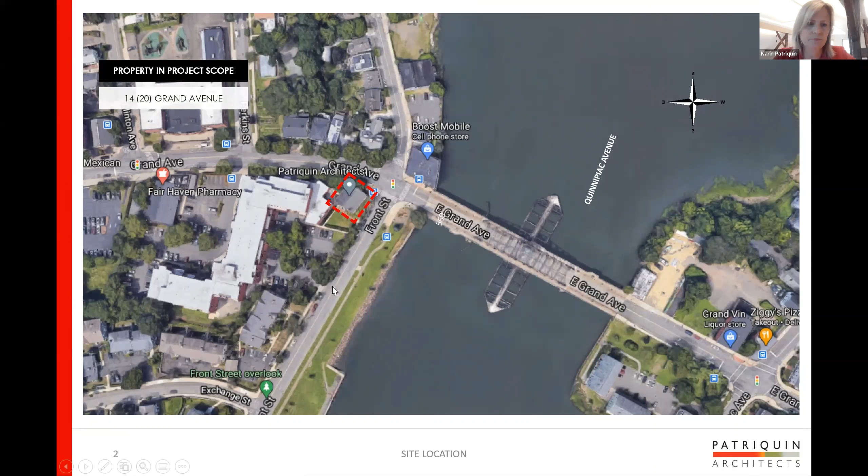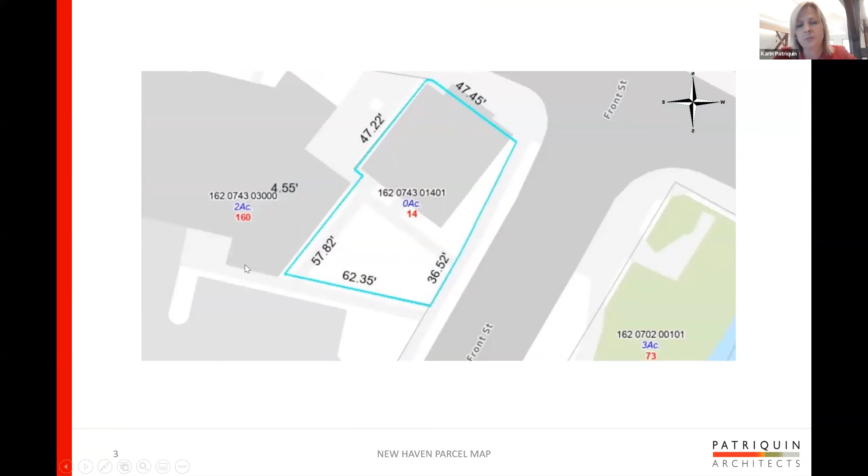This is the extent of the property as it currently stands. So our building and a lawn in the back. And then we have shared parking with the neighbor next door. So here's some Sanborn maps that really speak to what this was in the 19th century. The earliest Sanborn that we were able to find is 1886. You see top left, the building here in pink signifies masonry in these Sanborn maps, and yellow is wood. What's now our current masonry building is here in the top right.

And there were these buildings that were added to the side of it and to the back of it by King. So you can see also the addresses, interestingly. Our building was between 14 and 20. So four addresses for our building alone, and then it went all the way up to 42. And to this day, there are some records that call this 14, some call it 20, some call it 14 to 20 Grand Avenue. The next one here, oops, sorry, I didn't mean to do that.

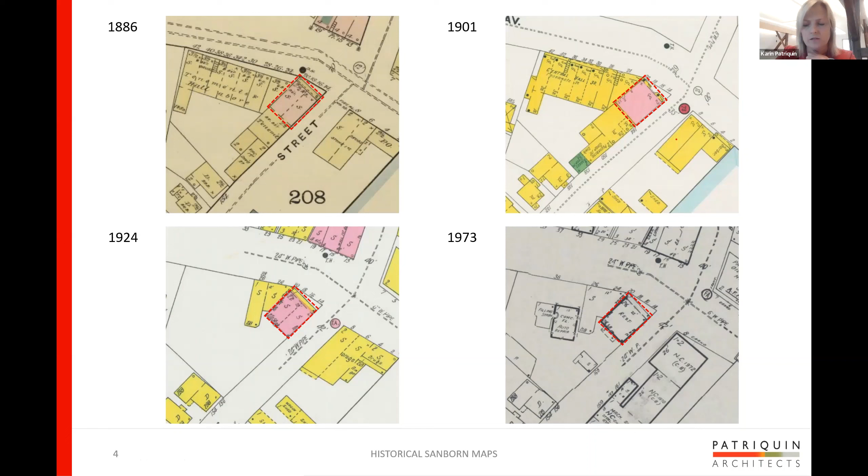The next, top right, you can see there was a slight change here, not too much of a change, but by 1924, the bulk of the buildings that were attached to the masonry were taken down. We don't know why particularly, but certainly by 1973 there was still one building off to the side, nothing off to the bottom except a fire escape stair, and this little building here was on the property somewhere. So Sanborns are always interesting to look at to get an idea of the history. Basically, we really see the history on the building.

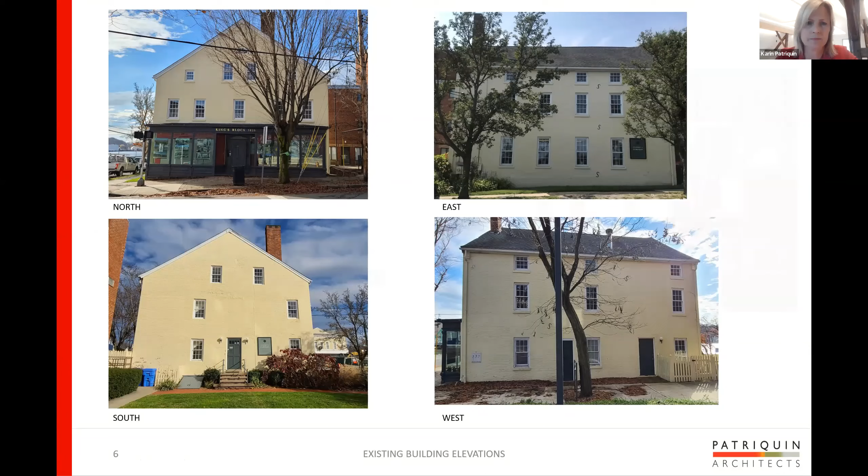So this is from our application to HDC for our renovation. Our renovation is really mostly an interior renovation, and that was very specific. We really wanted to bring this up to a passive house standard, but did not want to touch the windows. We looked at pricing windows that would look exactly as these ones did, extremely expensive and also not nearly as energy efficient as the ones that we finally went with. So we decided to do everything on the interior. We re-insulated on the interior, recreated an air barrier on the interior, and added windows to the interior.

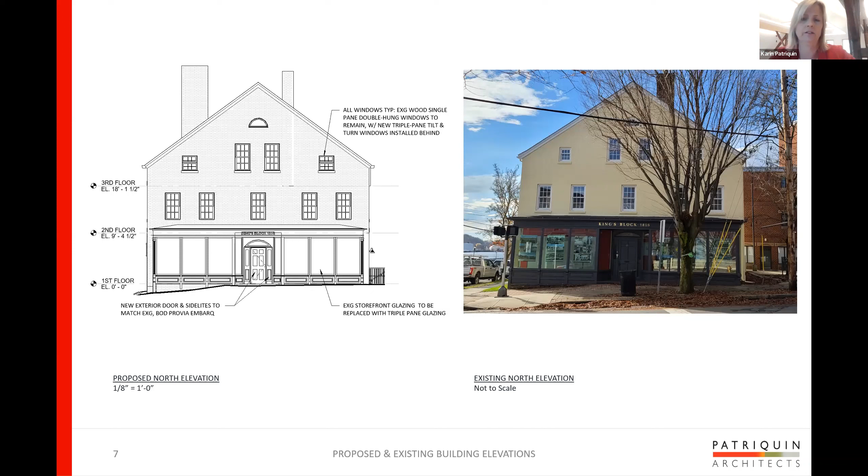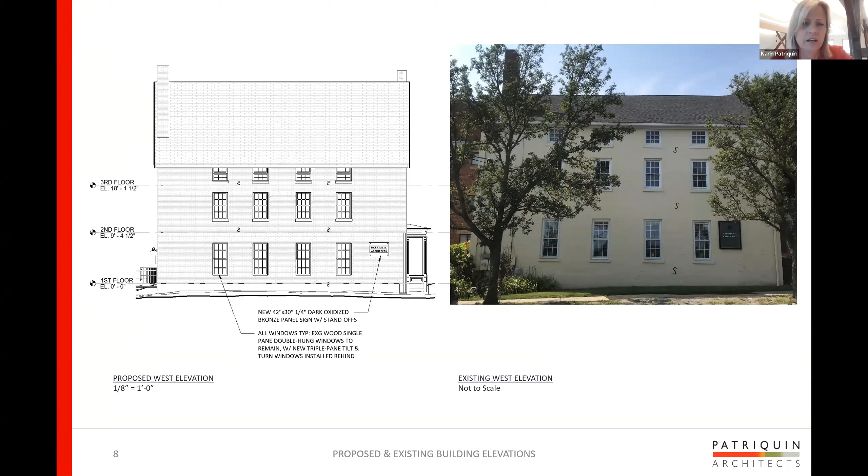Here's our front street facade, and here all we're doing is changing some signage, and again we make a note here that we're adding windows to the interior. And here on the back again is our argument for where to put any of the penetrations that we need for our new mechanical systems.

The idea again here being that this was already something that was not necessarily supposed to be a very visible part of the building when it was first built and over the years, so we allowed ourselves to put small penetrations here, and then we painted them the same color as the yellow here, for those intake and exhaust of our new mechanical systems, and then some signage and some new exterior lighting.

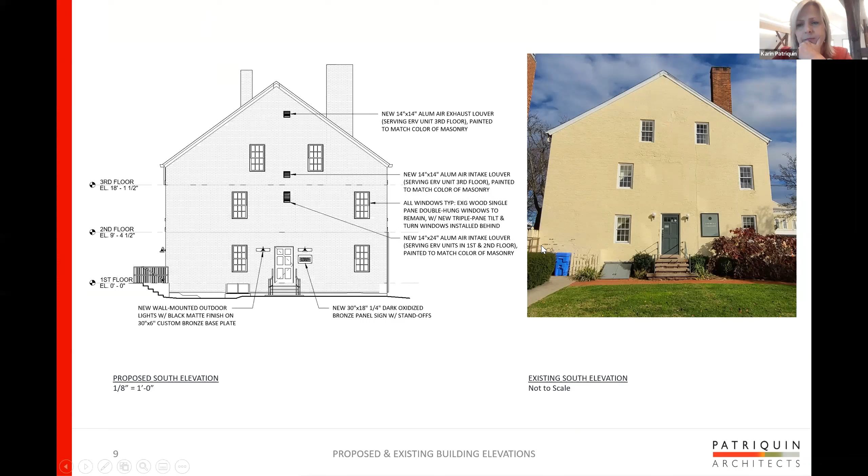On this side, very little change, just a new light. And again, we just make a note about these windows being changed over. We also changed the front windows to triple pane windows.

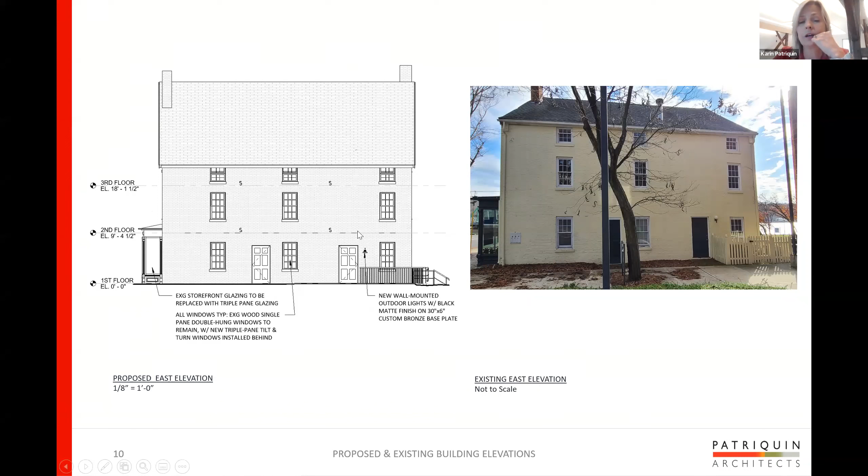So here, this tells two stories. One is the volumes of our building. So on the first floor, what used to be the hotel lobby and dining room will eventually be a cafe. We haven't actually put in our approvals for that yet, but we're very excited to recreate a building that will be more public.

And then we have new mechanical systems that bring in fresh air and filter that fresh air and create a very, very energy efficient system. You can also see that we are disconnecting the basement thermally and from an air barrier perspective as well. And that was for many reasons. One is that the air in our building used to be really, really mold filled. No matter where you were, it smelled, even though on the upper floors there was no mold itself, but the air was coming in from the basement.

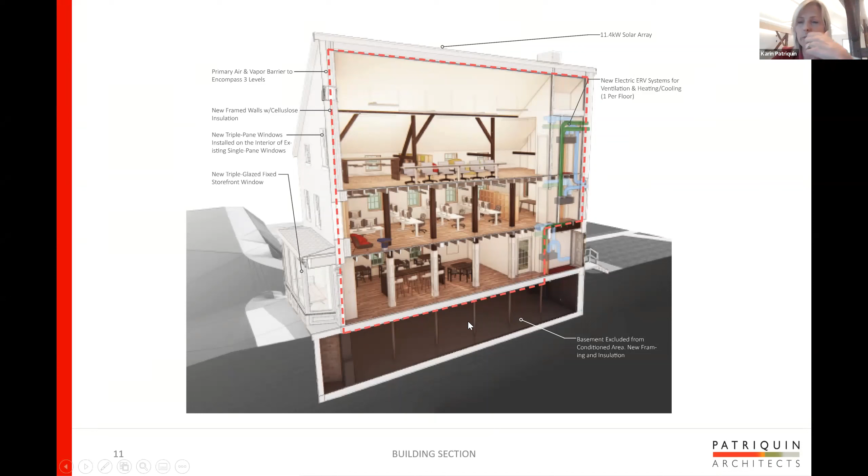So one thing in making a better air quality was to bring the mechanicals to each floor. Another reason is that we are right by the river. The river is back here; you can see it from our windows. We are just above the 100-year floodplain, but there is moisture, and we are also in the 500-year floodplain. So we didn't want to put any of our mechanicals or any essential pieces in the basement. It does have a dehumidifier now and will be storage. We can use it for that, but we don't want to use it for essential functions.

So what is passive house? What is our passive house retrofit? Really, it is an improved envelope. So creating an air barrier that's very tight, creating a much improved insulation value, much over building code, improved interior windows, and then new mechanical systems that are separate for each floor. So we now have three mechanical systems where there used to be three gigantic gas furnaces in the basement. So the intent for this passive house retrofit is to respond to climate change through greatly improved energy efficiency.

Again, to create fewer energy loads, to decrease the loads, we are making sure that the air here is very controlled. We also calculated all our interior loads, our plug loads, and eventually we'll also be adding some solar panels, photovoltaics, that will offset 80% of our energy.

We're also improving the interior conditions and occupant health. We also know from an office standpoint, there have been a lot of studies showing fewer sick days and much improved productivity with better air. And this is really a big part of a renovation as well. And then resiliency. We want to extend the building's lifespan and preserve a key part of New Haven architectural history.

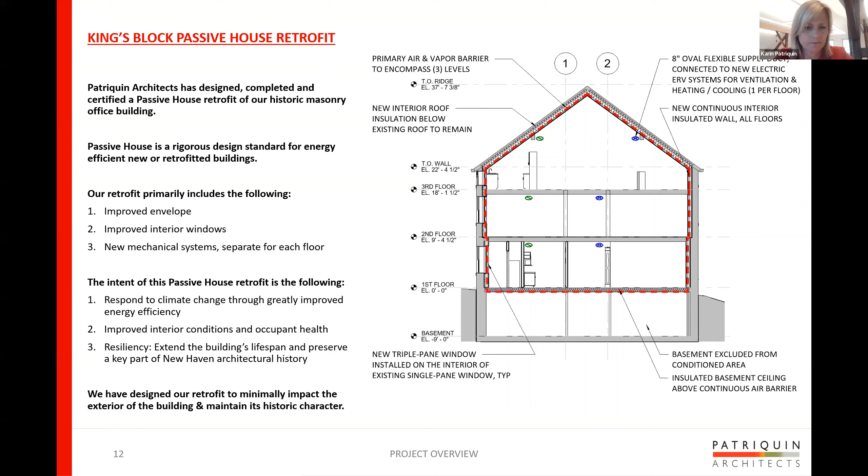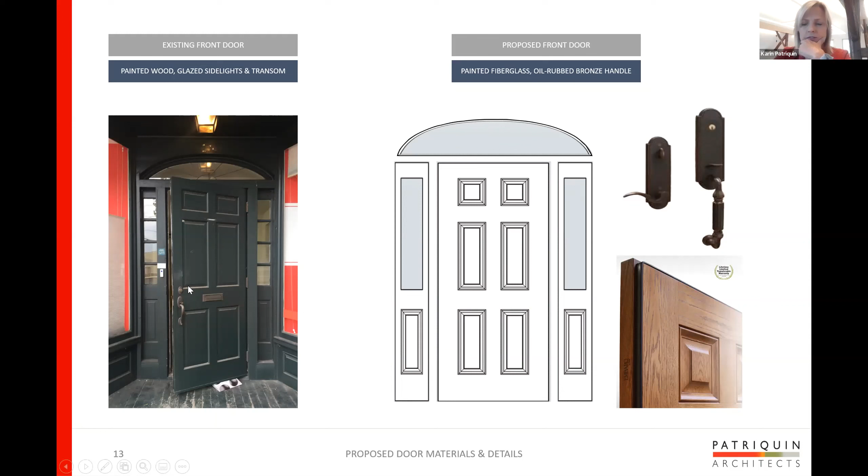So elements that we did need to change: any openings to a part of the building that's open to the elements need to be highly insulated. We do have a custom, this is not the customized version, there is a custom version of this door and surround that we still have to finalize, it's not yet in. Triple pane windows, we did do these, we've replaced these double pane windows with triple pane windows. We're adding some signage, and we changed some of the lights. These are just elements that we were going through with the Historic District Commission.

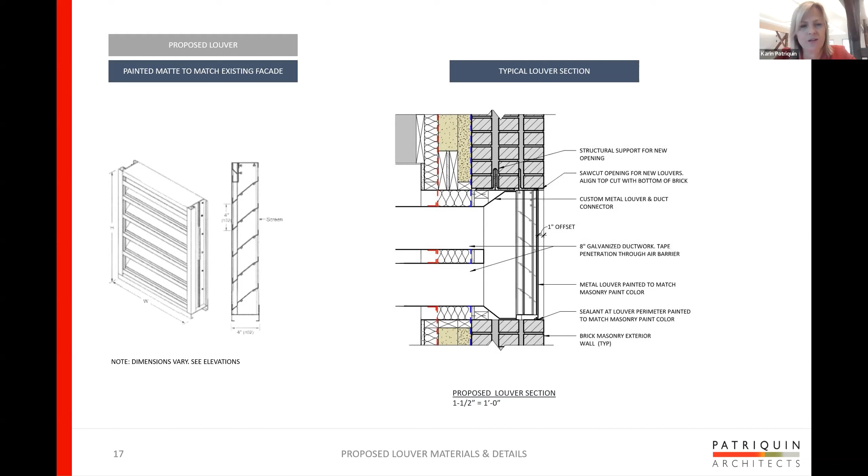Added a layer of what's called a Stego Wrap here, which is the first barrier for bulk water, and then dense packed cellulose, then our air barrier. And anytime this air barrier is moving into different planes, it had to be very, very carefully taped and looked at with neighboring materials to make sure that was a continuous air barrier. Outside of our air barrier, we have another 2x3 of furring that allows for any of the electrical to go into, so that you're never piercing that air barrier, and it also has additional insulation in that as well.

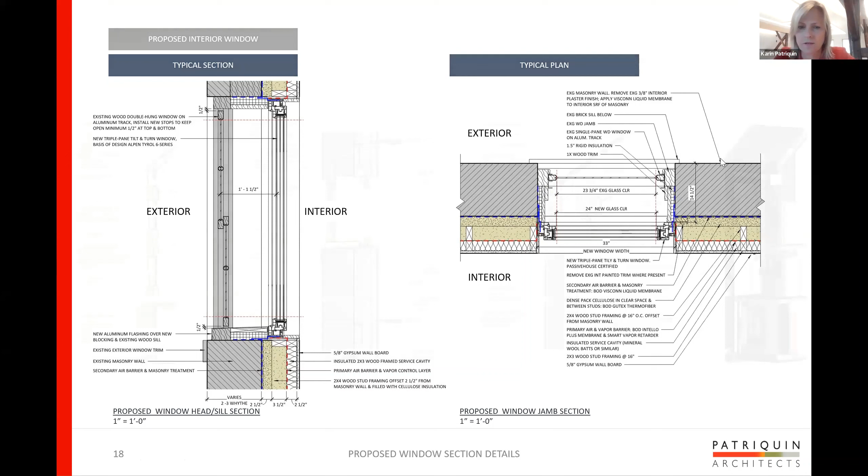So here, just some more details of the wall sections. At the roof level, we added some structure for structural reasons, but also to give us some more depth and a straight plane, so we could actually sheetrock it again because it was very wavy. So we added some structure to the existing joists, so that we could have more insulation there.

I do have a cheat sheet on how much insulation we have where. I think there was maybe a question about that later, but in the walls we have an R34, for instance. In the roof we have an R62, and our basement ceiling, which is basically the equivalent of our floor, is an R37.5.

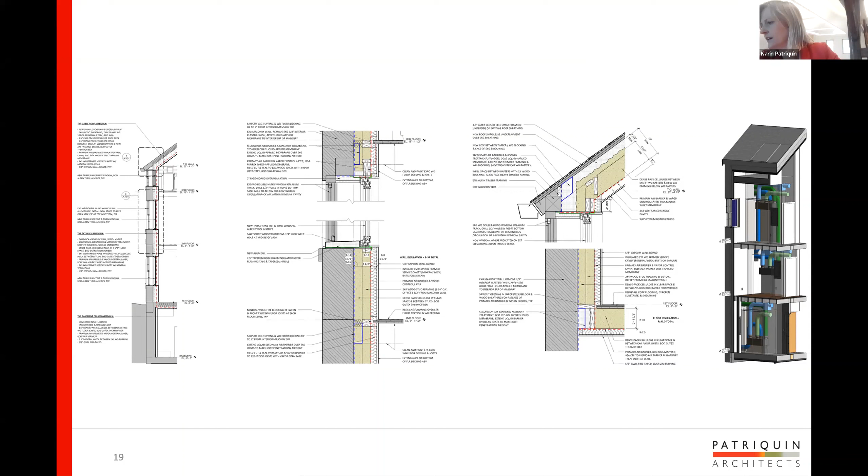So here is what is currently our first floor. We have not finished the first floor yet. We're waiting for our new tenant. But this shows you the double wall and the double window. So those are the existing windows that are still there. And in fact, for moisture and to prevent condensation, we actually keep those a little bit open so the air can just do what it needs to do. It's actually usually being used almost as a screen now.

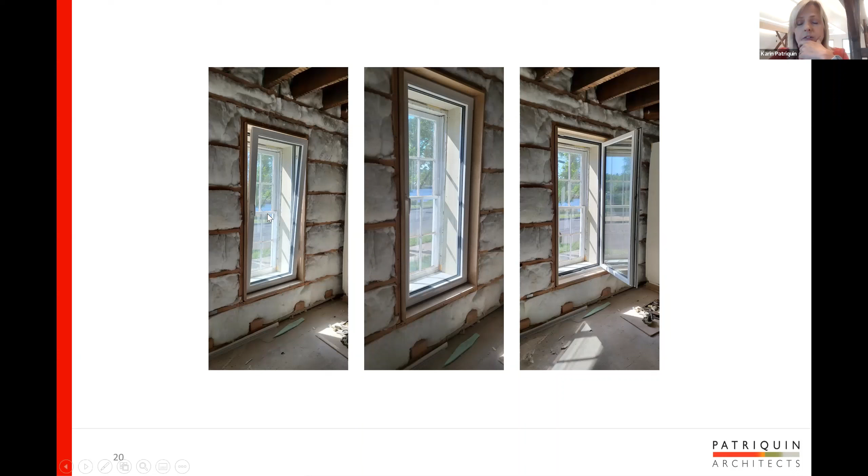And this is really what is keeping the elements out, these new triple pane windows. So it's in a closed position. This is the open for if you want to clean or open that window. And then this is a ventilation mode where it just stays open like this if you want to bring in fresh air.

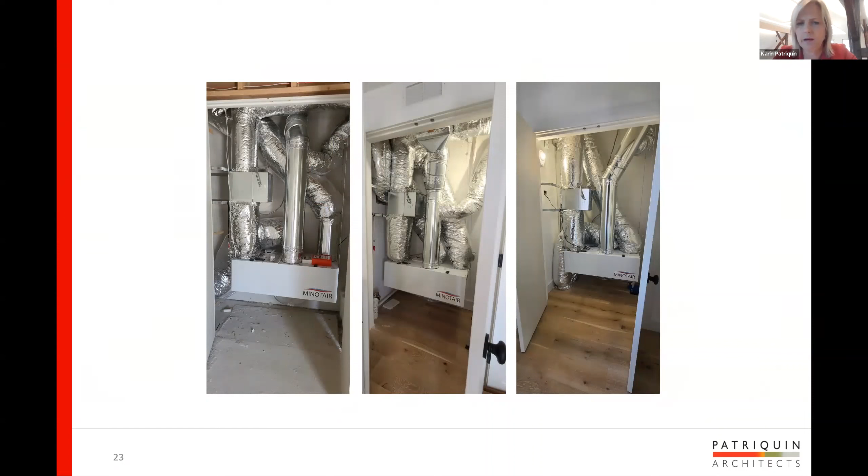These are our new mechanical systems, one on each floor, very small. This is a 6-foot door that you can see there. So that box itself is probably 18 by 40 maybe.

And then here's some photos of the construction. So these are the 3 floors, top floor, middle floor, and bottom floor at different moments in time. On the left is when we exposed the structure, took off some of the plaster and sheetrock, which is when we found a number of structural elements that we had to fix, including a chimney that was leaning precariously over a sidewalk, so we had to stop construction and fix that.

Next is where we sprayed with this Sto Gold, it's called, to prevent that first layer of bulk water from entering the building. Then on the 3rd floor, you can see we added those joists again to add some depth so we can get some more insulation in here. And then what you see here is the air barrier where we have the dense packed cellulose blown in behind it. And then you can see the furring for where the sheetrock is going to go up, and then an extra layer of insulation there.

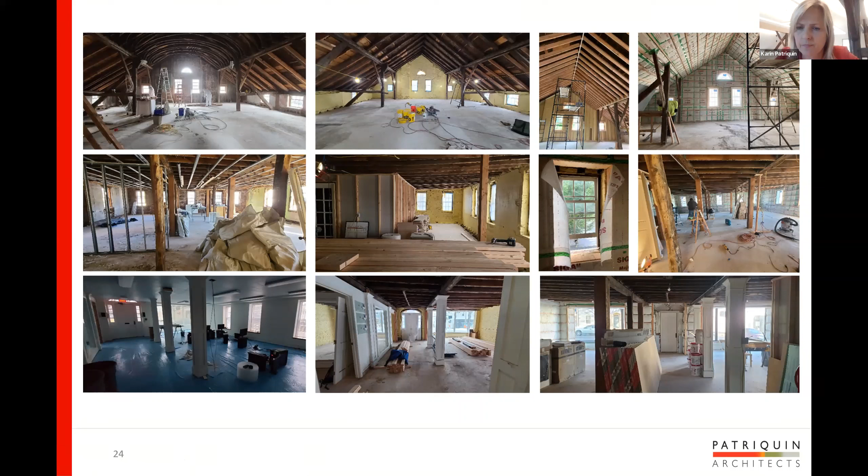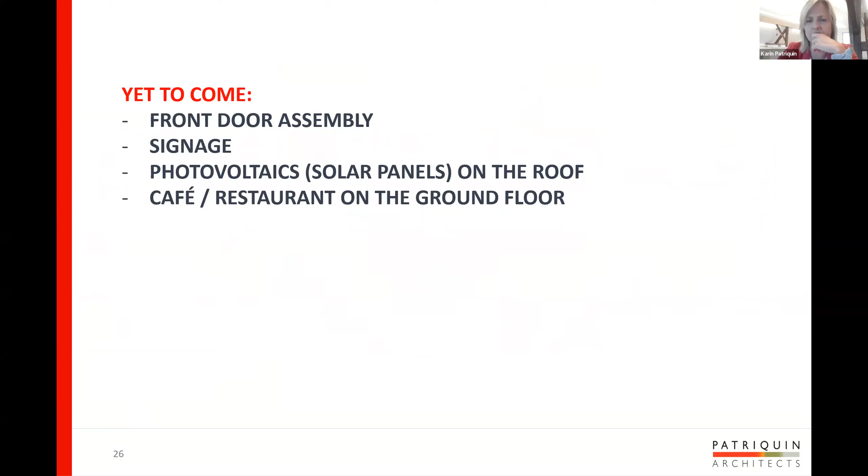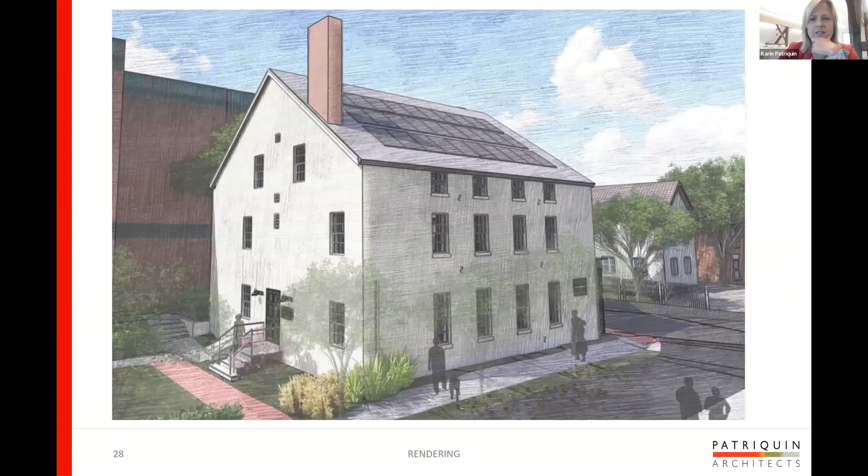A few things that are yet to come. Our front door assembly we need to finalize. We know we need to do some signage, and then two more big steps for us: the photovoltaics, which we just received approval for with the HDC, and a cafe restaurant that will be added on the ground floor. So these are some drawings from the HDC application that will be on the southwest side, and here's a rendering of the front, starting to activate that storefront space to allow for public use.

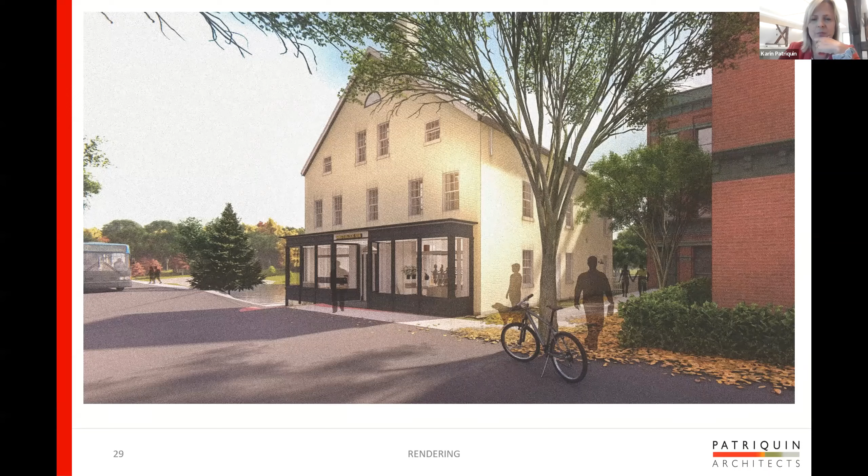This is our concept now for a cafe, and we'll have to work with the cafe to understand what their needs are and what our goals are for our building as a passive house building, because, for instance, we do not want a large exhaust that would just negate everything that we've done. So different types of cooking. So certainly no fossil fuels, no gas, all electric. Probably induction, no deep fryers, those kind of things.

So it will be a discussion on how the menu will be set, how they are cooking, and that's something that they were actually very, very interested in as well. So that'll be an interesting talk. We know that the Hotel Marcel just opened up, and they have a passive house renovation as well, and their restaurant is fully functioning as all electric. So some lessons learned there as well, I'm sure.

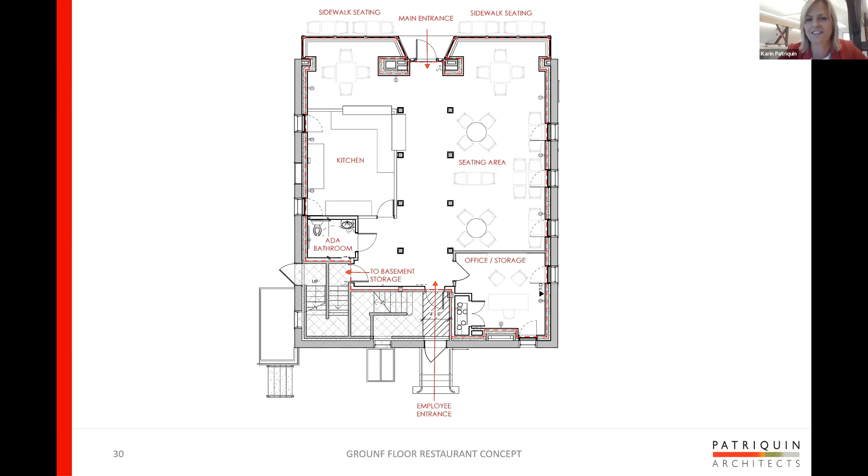And then here's a rendering of what we're hoping will be a more active storefront than has been in the last 20, 30 years. In fact, when I started renting on the first floor, those front windows, these really large windows, were always just shaded. The shades were down, so it just feels like a very cold front, because you don't know what's going on inside. So we're really excited to activate that.

And that's it. So I was hoping that we would have enough time for any questions and discussion. And I think we do have that time. That's fantastic. Thank you, Karin. You're very welcome. I think there are a lot of questions. I don't know if anyone wanted to start the conversation off, or I can go to some of the questions that were submitted before the program.

So I know this was in your presentation in the sections, the details, but how were the walls and roof insulated, with what materials? Maybe a review. Sure, absolutely. Let's see. So overall, the majority of insulation, so the R value, is to the exterior of our air vapor barrier that we talked about. So dense packed cellulose provides the majority of our R value in the walls, roof, and basement. So each of those then were separately dealt with.

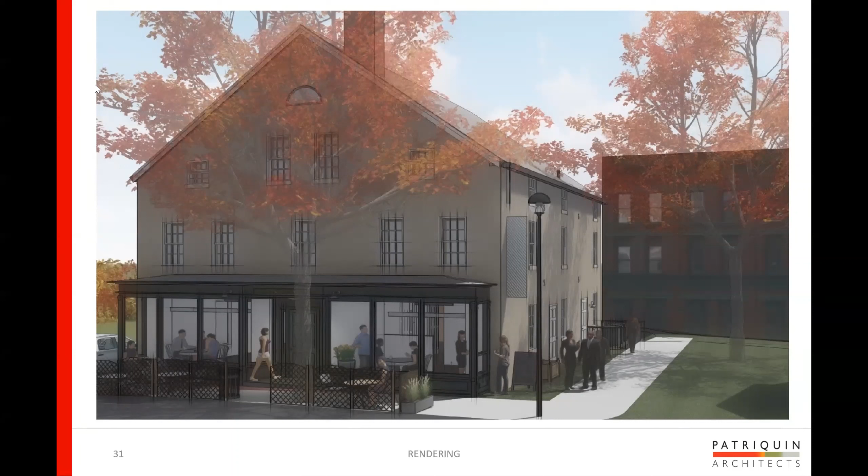Absolutely. Karin, that was going to be my question. This is Stacy. The double window is just fascinating to me. Can you talk a little bit more about how that functions and how you make sure that condensation doesn't happen and all that good stuff?

Yeah. So when we looked at it, I went to a couple of conferences. One was in Boston, and in the Boston area, for some reason, they've done a lot more experimentation on either double windows or just historic renovation typologies with windows in general. When I visited, there were a few people that had done it, but not at a passive house level. So there are examples that I could point to, and I had learned from a couple of contractors. In other cities, in Montreal, for instance, where I'm from, double windows are very common. So what here you would just call the storm window is just much more beefy and also insulative.

So the thing that you do is that on the inside window, you make sure that it is operable, and then the outside window, when you see condensation, you actually just open up a little thing that has holes in it, so that you have some air movement between the two windows. It's the fact that you're trapping air in between that creates the condensation. And in our case here in our building, we're actually just keeping all the windows open an inch or so. We've been monitoring for about 3-4 months, and so far, that has done the trick.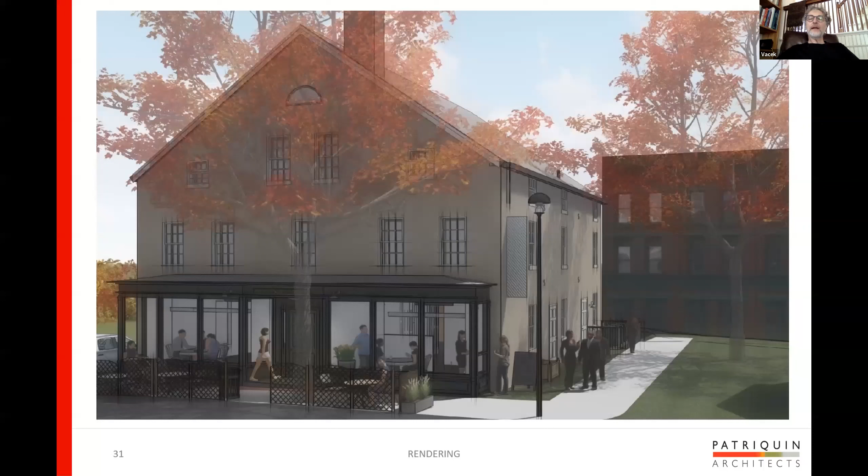Vasek, I thought you had your hand up. I did. My question was, I'm curious, it was hard to tell from your drawings. How thick did your walls end up being? How thick are they? That's a good question. Let's see, I'm trying to remember. I think they are now 9 in total, but I think we were close to that anyway. I think we added 2 inches in total because we ended up sort of reworking what was already existing.

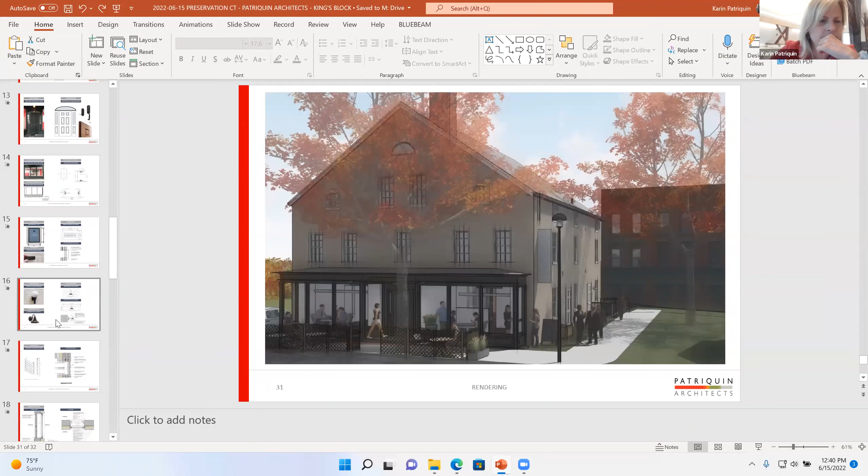Okay. Yeah, so let me just see if I can find that. Yeah, it's a little hard to tell. Oh darn, I thought we had. Sorry. Yeah, basically we've added this extra portion right here, this 2x3. So we probably added 3 inches to what it was before. Okay. No, I was just envisioning these massively large sills that would be wonderful for plants and the like, but

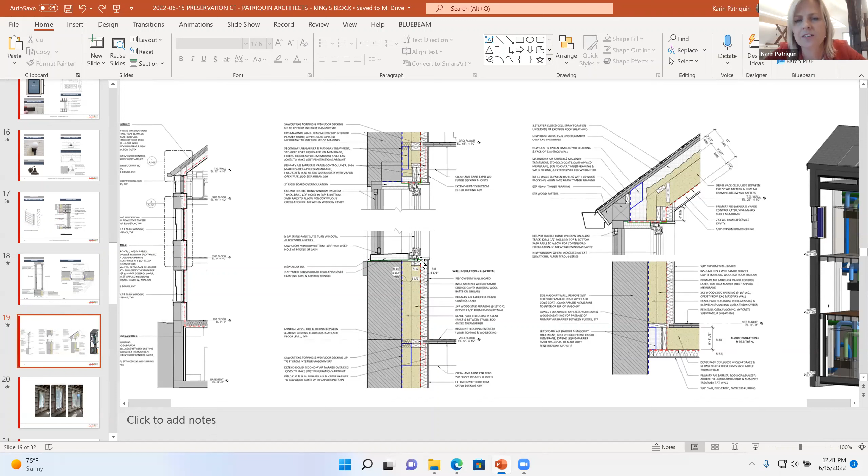yeah, so you can see on this drawing here, this is what it was before, and this probably ended right around here, and then we added this. But because we want to have our new window in line with the structure, we don't actually end up with big sills. Yeah. Thank you.

Karin, we had in the chat from your firm 20-inch exterior face of brick to interior face of the drywall. Oh, including the brick. Okay. Yeah. That's fine. Thank you.